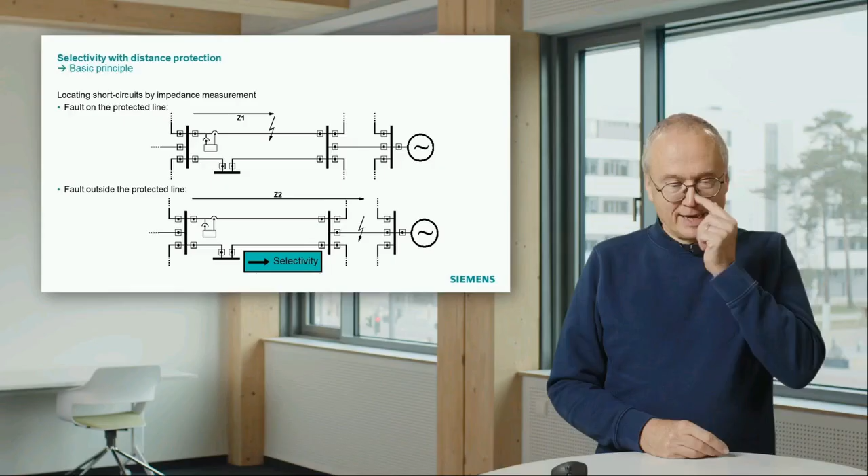This protection relay measures permanently the impedance into the line, and if there is a fault on the line, it measures the impedance of the piece of line from the relay to the fault. That means if it measures this low impedance, it knows there is a fault on the line. If there is a fault on the next line, it will also see this fault, but it will measure an impedance which is a bit higher, and from that comparison of the measured impedance with the impedance of the line, it can decide whether the fault is on the line or not.

That means basically the distance protection principle will lead to selectivity. So from the measurement principle, it is selective, but there is a but, and to understand this but, we have to go a little bit into the details.

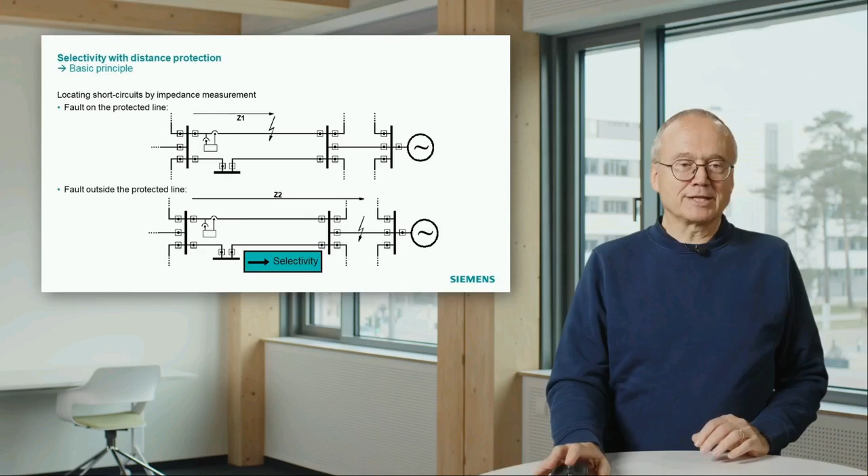First of all, I would like to look a little bit more into this measurement. What does this measurement mean? As a first approach, I make a very simple replica of the line. I just represent the line by a resistance. I know that's not true, but to understand the principle, it's a good way.

That means we assume we have a line. Beyond the line, we have the rest of a system, and we replace that by just an equivalent resistor, in this picture called the load resistor. At the beginning of the line, we measure the voltage and the current and can calculate the impedance. In normal operation, if we measure the voltage and the current and divide the voltage by the current, we measure a pretty high resistance of the line plus the load resistance, which is an equivalent for the rest of the system behind that. It's a pretty high value.

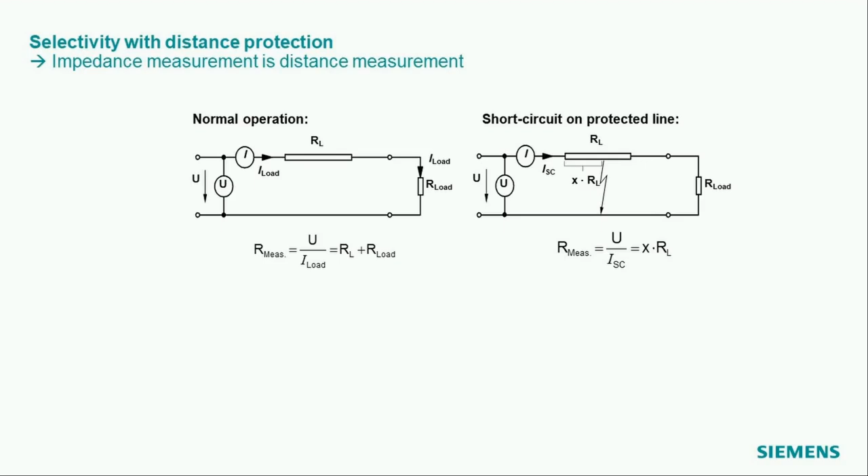If now we have a short circuit on the line, it looks like this: we make a short circuit from somewhere on the line to ground. Then we measure a reduced voltage, a high short circuit current, and the result, voltage divided by current, is a percentage X of the line resistance.

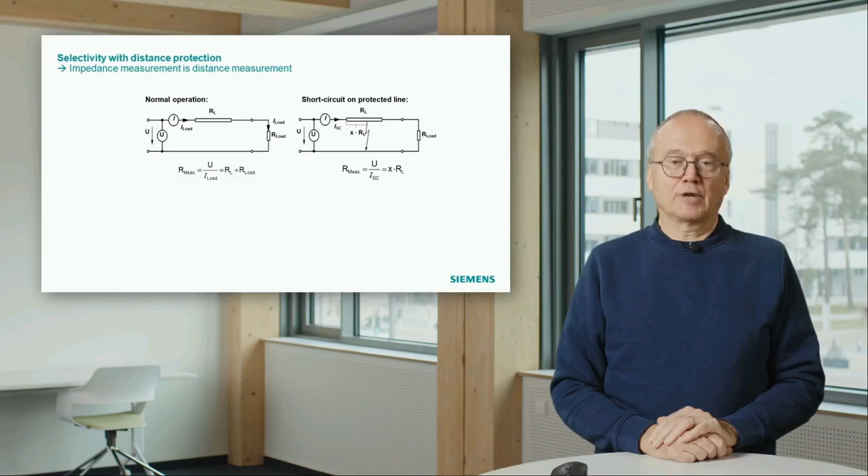If we have a fault on the next line, a short circuit on the next line, it looks like this. We have a circuit where we measure the resistance of our own line, plus part of the resistance of the next line. That means also a low value, but higher than in the first case where we have a fault on our own line. That means if we compare the measured resistance with the known resistance of the line, we can make the decision whether the fault is on the line or not.

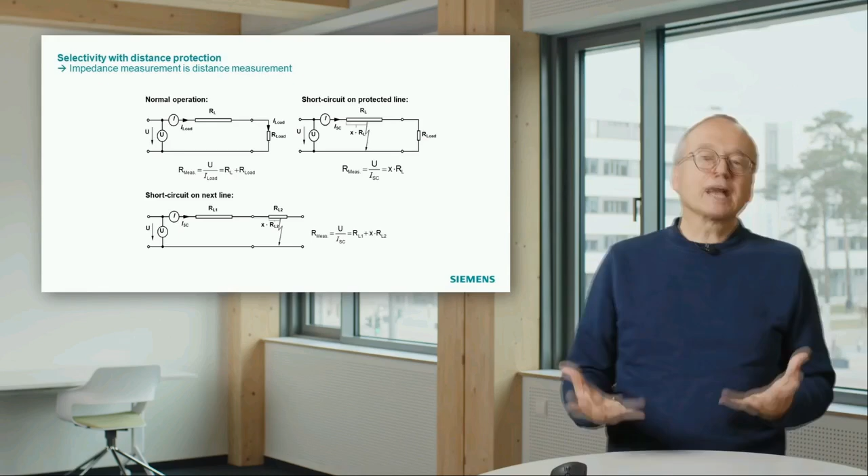In reality, it's unfortunately a bit more complex. We have a three-phase system, and impedances are always defined in loops. If we have three phases, we can define in total 6 loops. We can define the impedance between phase 1 to ground, phase 2 to ground, phase 3 to ground, and we can also measure the impedances between the phases: phase 1 to phase 2, phase 2 to phase 3, and phase 3 to phase 1.

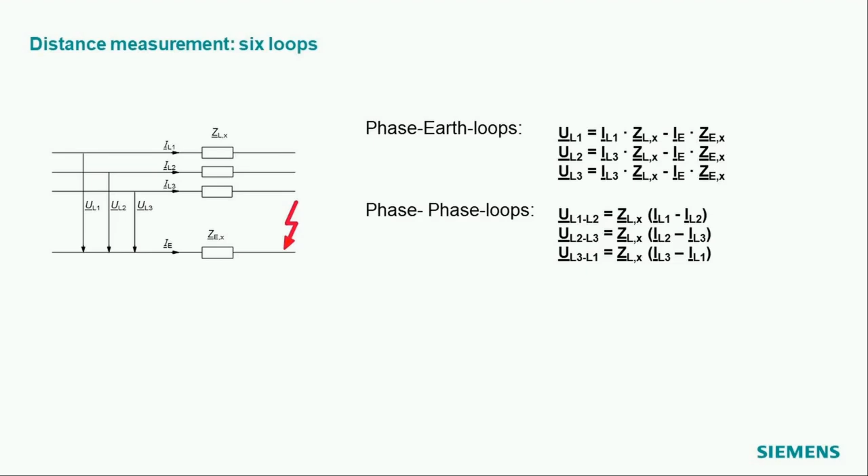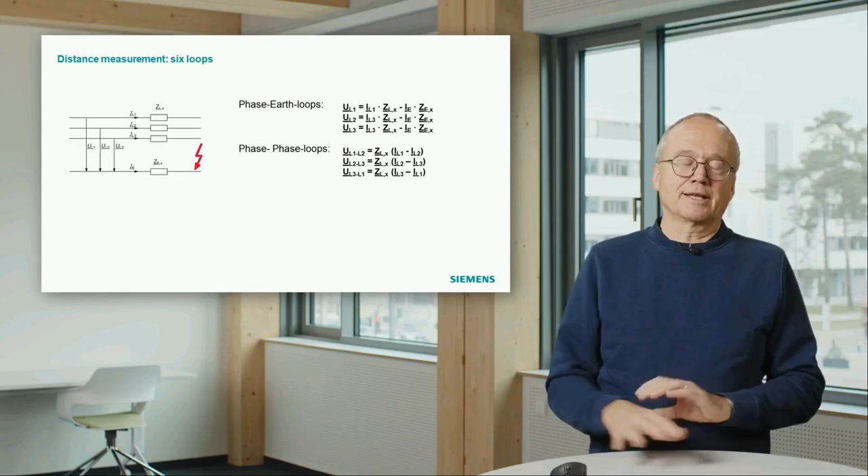That means a normal protection relay has to deal with all these 6 impedances in parallel. That's a bit of workload for the relay, but in most cases we don't have to consider this in the following slides, since normally modern relays always handle these 6 loops in parallel.

You may still have some relays in operation which are called switched relays. In older technologies like electronic relays or electromechanical relays, or also in the early days of digital relays, people were using switched relays, and these relays were only measuring one loop. That means they had to decide in the beginning which loop to measure. But nowadays, all modern relays measure all 6 loops in parallel. That is one thing we have to take into account.

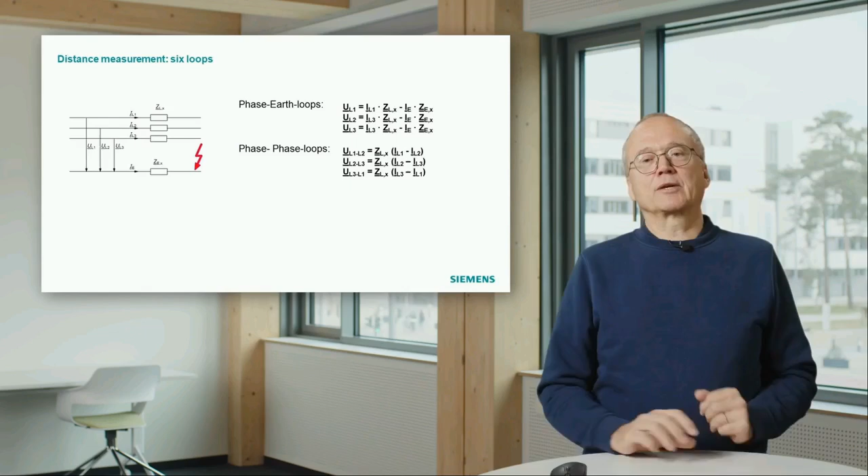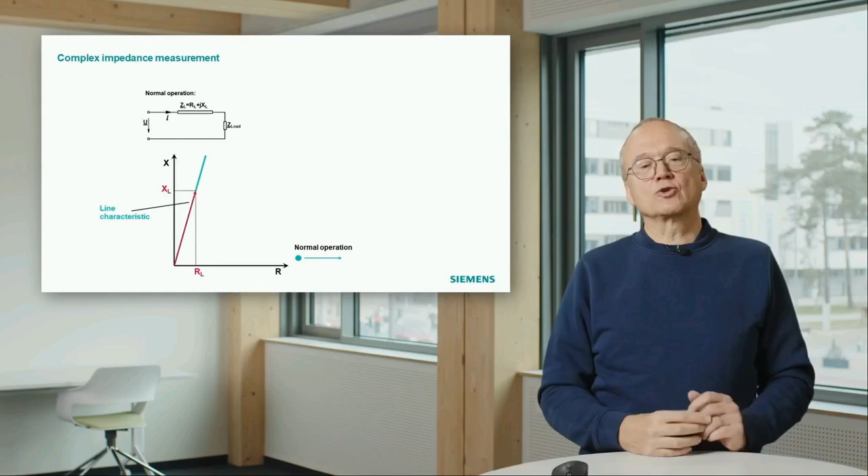If you have a fault on the line, a short circuit, you measure an impedance which is, in this case, in the middle of the line, somewhere here. That means you measure an impedance which is somewhere on our red arrow. If you had a short circuit at the very beginning of the line, you would measure a point at the origin. If you had a short circuit at the end of the line, you would measure an impedance at the end of this arrow.

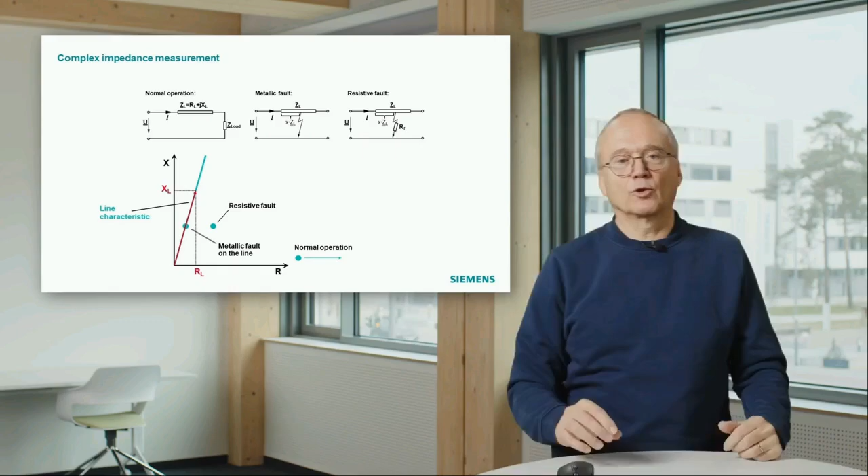If you have a fault with a fault resistance, that is also something which can happen. If you have a phase-to-ground fault somewhere on the tower, with a lightning arc giving a fault resistance and a tower resistance, then you move out to the right. A fault without fault resistance is at a certain location on the red arrow; if you have fault resistance, you move to the right, further the bigger the fault resistance is. And if you have a fault on the next line, you are somewhere out there.

As a result of this discussion, we don't just want to draw nice diagrams. What we want to do is make the decision: is the fault on our line or not?

So what can we take from this? We see the resistive part of the measured impedance is influenced by the fault resistance, and it can be anything - zero, or a high fault resistance. But what we also see is that the reactance is not influenced.

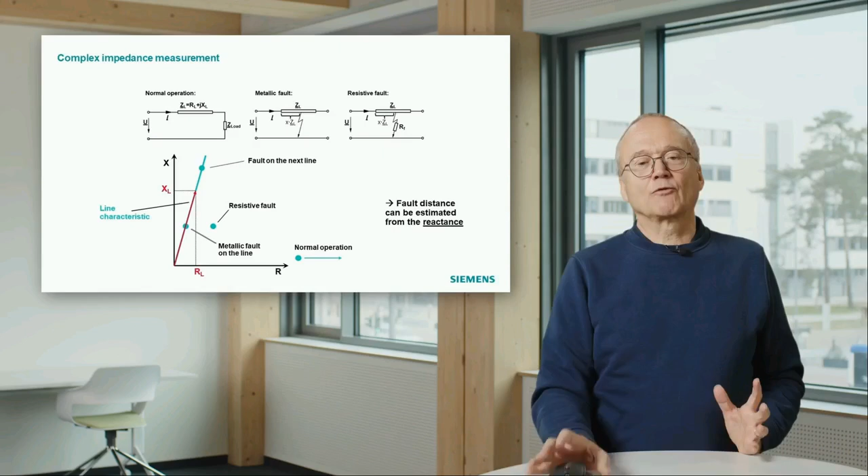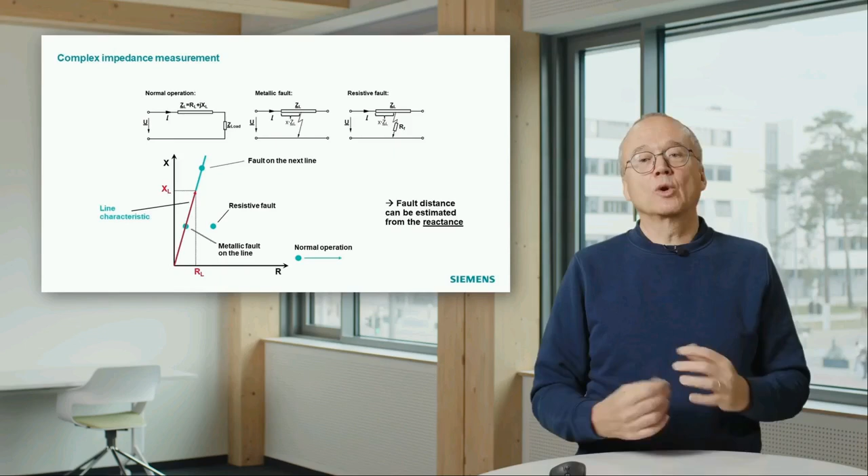That means we can take the measured reactance to the fault as a criterion for whether the fault is on our line or not. The fault distance can be estimated from the measured reactance. We measure the complex impedance, split it into resistive and reactive parts, and take the reactance as a criterion for where the fault is. We compare that with the reactance of the line, and if it is lower than the line reactance, we know the fault is on the line.

That is the idea of the first zone of a distance protection relay. We take the complex plane and define a certain area in it. If we detect a fault in this area, we say the fault is on the line. As we just discussed, the upper limit is the line reactance, so if we want to set a distance relay, we ask our network planning people what the total reactance of our line is, and that becomes our horizontal limit.

Then, to have a complete area, we must also define a limitation on the right side. This is a tricky thing, because we must decide what amount of fault resistance we want to catch. If we make this narrow, and we have a significant fault resistance, we would measure something outside the zone and would not trip.

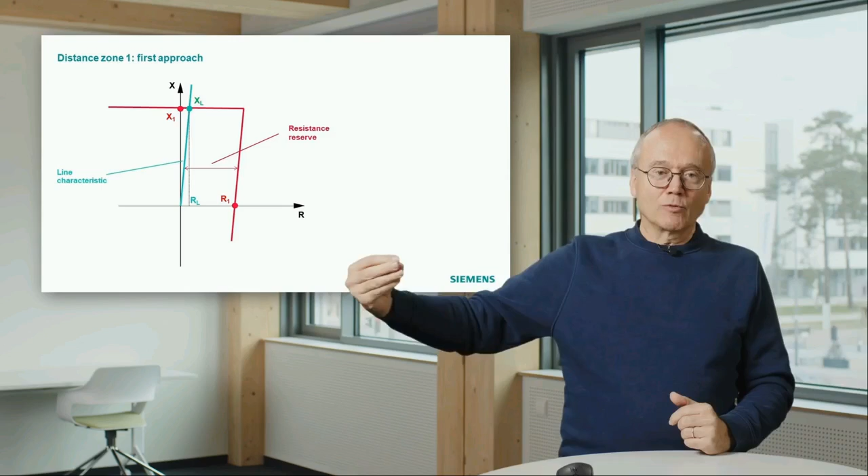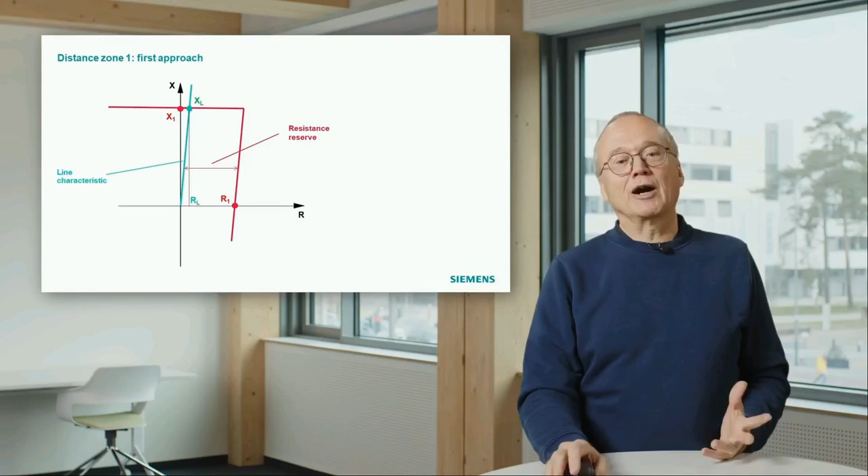If we make it very big, we have the risk that with increasing load flow, we move into the diagram. We must be careful that the right side doesn't go too far - otherwise we'd be very sensitive and able to catch high resistive faults, but in a strong load situation, the measured point would move in and we would trip on load. That's not good. This resistance reserve setting is always a discussion, and we'll talk about it more at the end of this video.

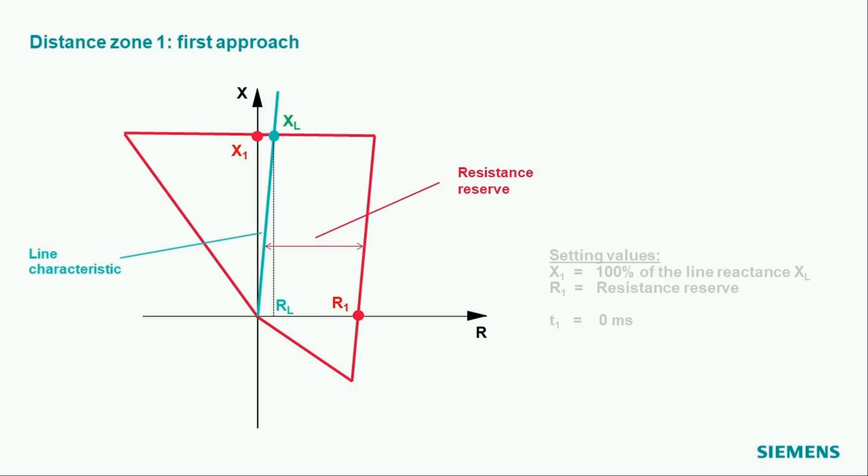To make this area complete, normally we'd limit it to the first quadrant, though for some reasons it's usually widened up a bit. So the first zone looks like this: we make a reactive setting of 100% of the line reactance, and the resistive setting is calculated from the expected fault resistance. If we measure an impedance inside this characteristic, we would trip.

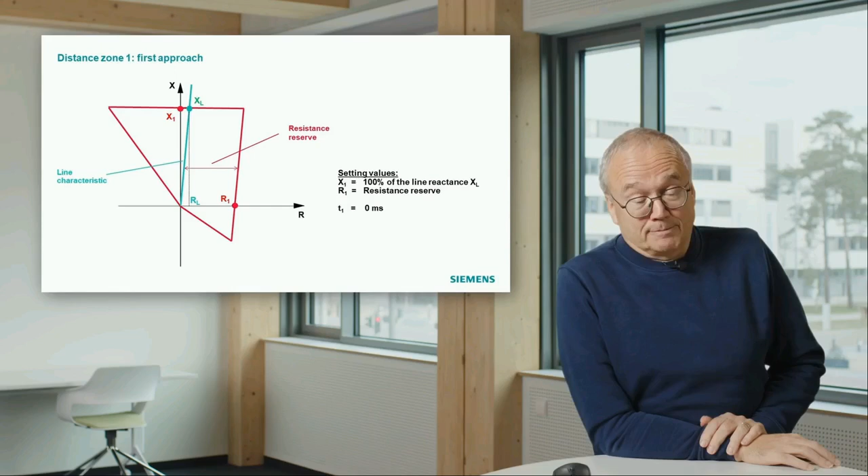So the question is, will that work? It looks nice and selective - as soon as the short circuit is a bit beyond this reactance on the next line, it will not trip. But does it really work? You can imagine, if I ask the question like that, the answer is no, it does not work.

Why will such a setting cause a problem? Because the impedance measurement is subject to measurement errors. In distance protection, you have quite a number of measurement errors. You measure currents and voltages through current transformers and voltage transformers, so you have measurement errors in both. The relays also have limited accuracy, and there are other disturbing effects that influence your measurements.

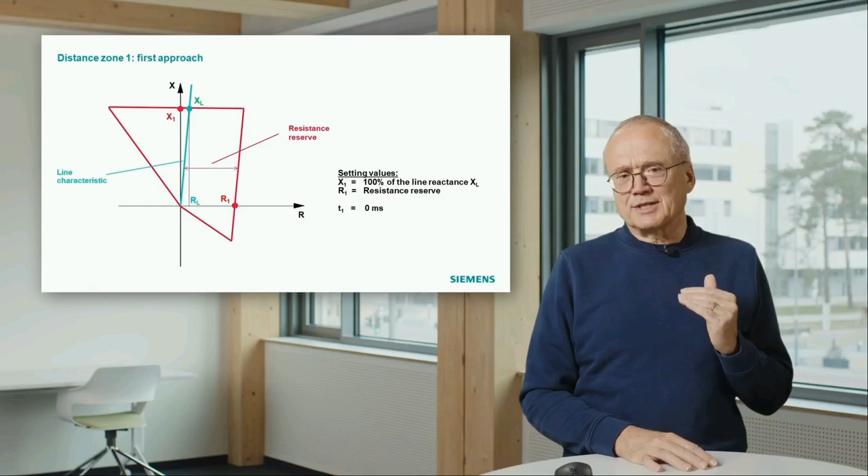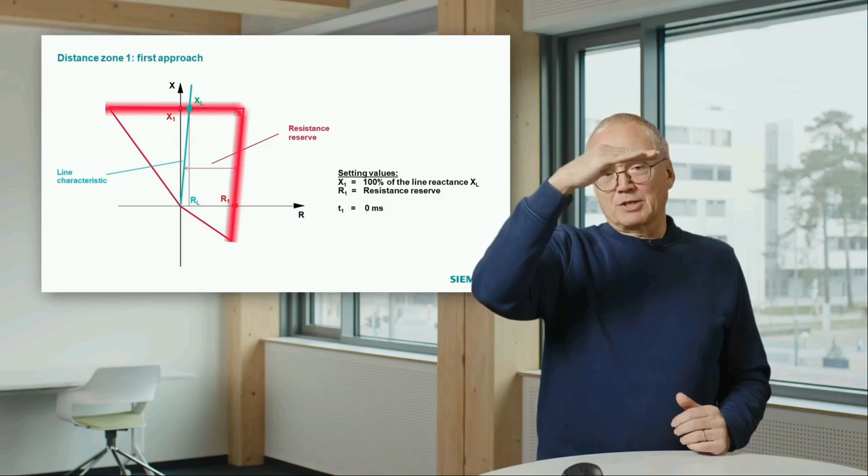If you want to measure phase-to-ground faults, you must know the zero sequence quantity of the line, which is also not very well known. The result is that this horizontal line is not really a sharp line - it looks more like a band, and depending on the direction of the measurement errors, it can be a bit higher or a bit lower. The same applies to the right-side limitation.

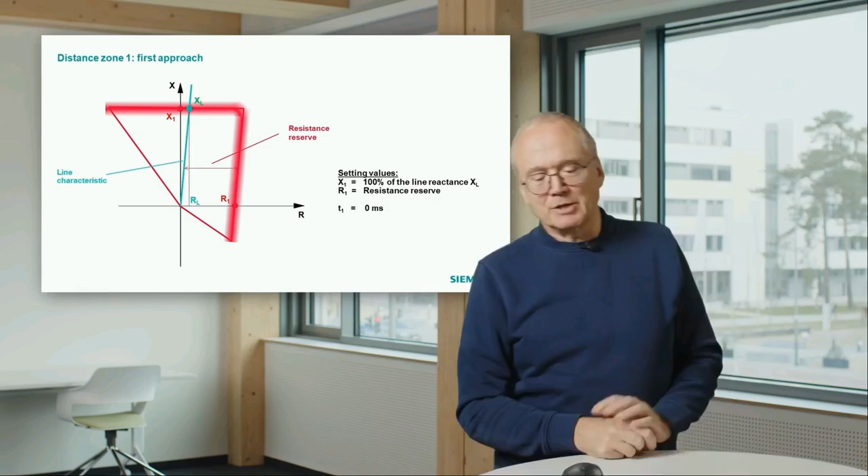What is the result of that? If you have a fault just beyond your line, at the beginning of the next line, it can be seen inside the characteristic due to these measurement errors. Or, if you have a fault just on the line but near the end, the relay measurement might say it's outside - I don't see it in the zone. That is a principal problem in distance protection: you have to live with this unsharp limitation, and one thing that bothers people most in this context is that it may cause wrong trips.

Because a short circuit on the very beginning of the next line may be seen inside the zone with these settings, this approach of making the horizontal limit 100% of the line reactance doesn't work. It may lead to wrong trips, and that is why it is normally not used.

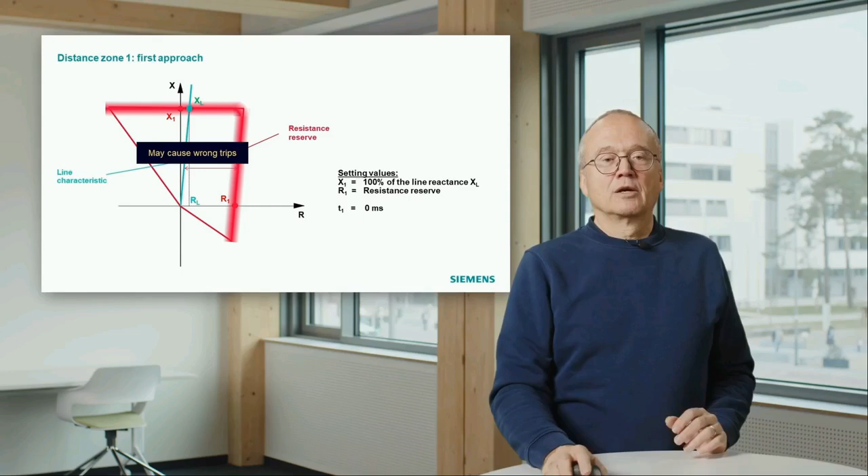So what can you do as an alternative? We start with the same thing. We have here our line characteristic, consisting of the reactive part XL and the resistive part RL. Now we make our limit a bit deeper, a bit lower, to avoid these wrong trips. What you typically do to cover possible measurement errors is make it some 10 to 20% lower.

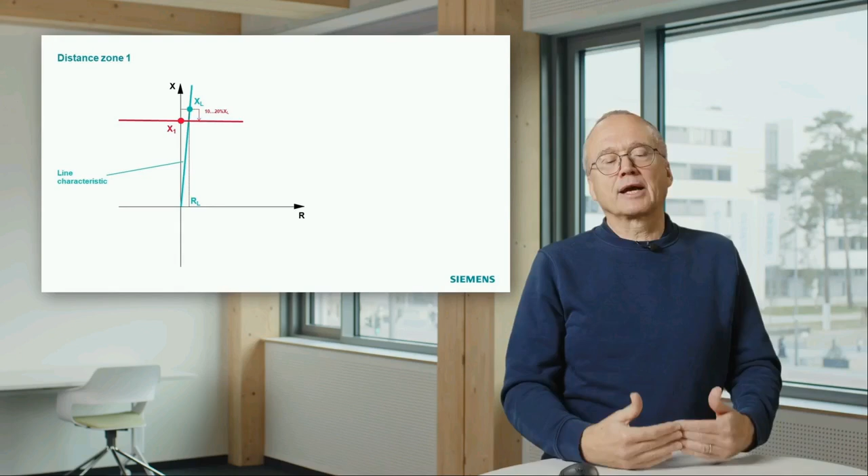That means you set this horizontal limit not to 100% of the line reactance, but for instance to 85%. Then the same for the right limitation for the fault resistance, and to make this area complete, also that limitation. That means we set the X value to 80 to 90% of the line reactance. That is a standard value which is normally applied in distance protection, and it avoids wrong tripping with faults on the next line, even with measurement errors.

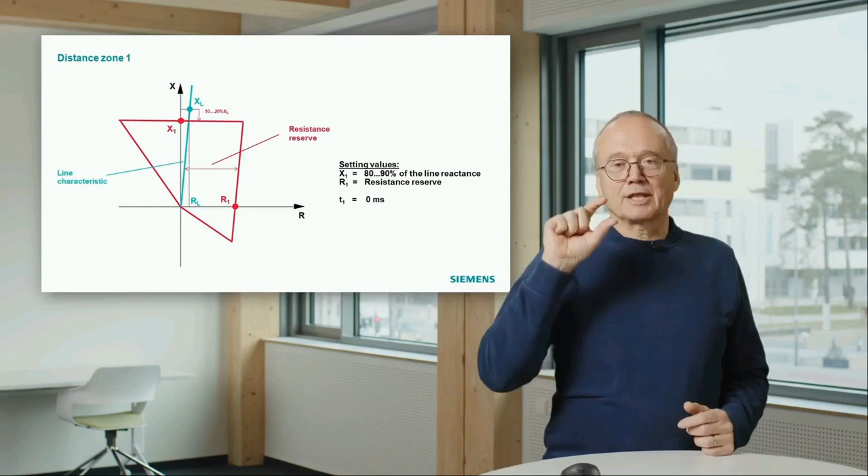But of course it has a disadvantage. You can imagine here, at the end of the line, if we say okay we have no measurement errors, at the end of the line you have a certain part where a short circuit will not be seen in the first zone. But at least you avoid wrong trips, and that is the important thing.

You avoid, with this setting, and this is a standard way of setting distance relays, wrong trips. But we must keep in mind that by using these settings we have a problem: short circuits near the end of the lines will not be seen by the relay and will not be tripped fast. That means we also have to find a solution for that.

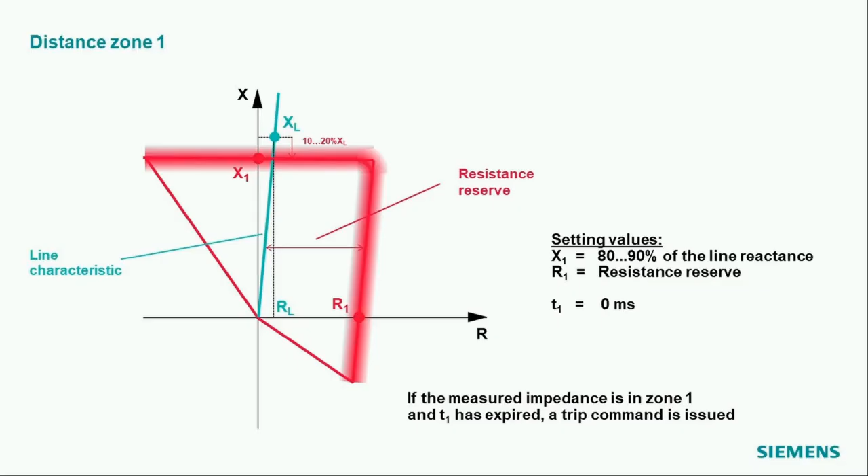Up to now we looked only at one relay. In real life, of course, every line has two ends. That means if there is a fault on the line, the measurement is from both sides. I would like to illustrate that a little bit using a simulation.

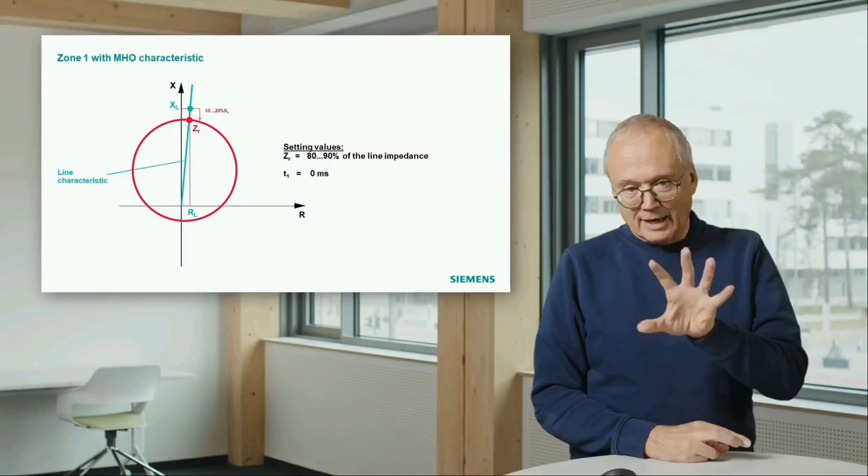The idea behind that is the same. You have this circular characteristic, and the setting principle is also the same. This circle is also a bit of an unsharp thing due to measurement errors, because you have to deal with the same measurement errors. That means you also have to do this reduced setting of 80 or 85%, and then you make a timer setting. All the other ideas I would like to discuss later on are also applicable if we have this type of characteristic.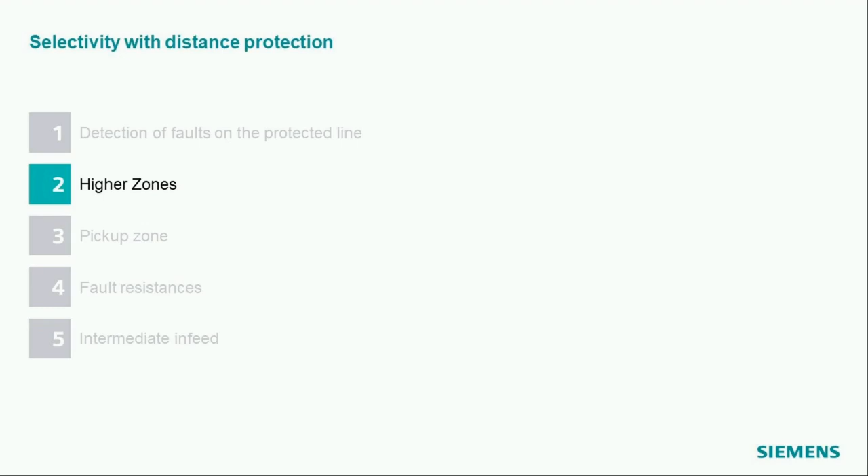Now let's look into higher zones. Up to now we discussed zone 1. Zone 1 reacts on most faults of the line, but we must keep in mind there is a certain part at the beginning and at the end of the line which is not seen in the first zone, depending on the measurement errors. That's one reason why we have higher zones.

If you look into a manual of a distance relay, you will see many zones. So you might ask, why do distance relays have more zones? One possible answer would be to react on faults at the end of the protected line, which I already discussed. Another option is it could be a backup for the next line. The reason could also be that we want to confuse the protection engineer. Or a last thing, these zones are required for other functions like teleprotection, auto reclose and so on. You can imagine I have 4 options here.

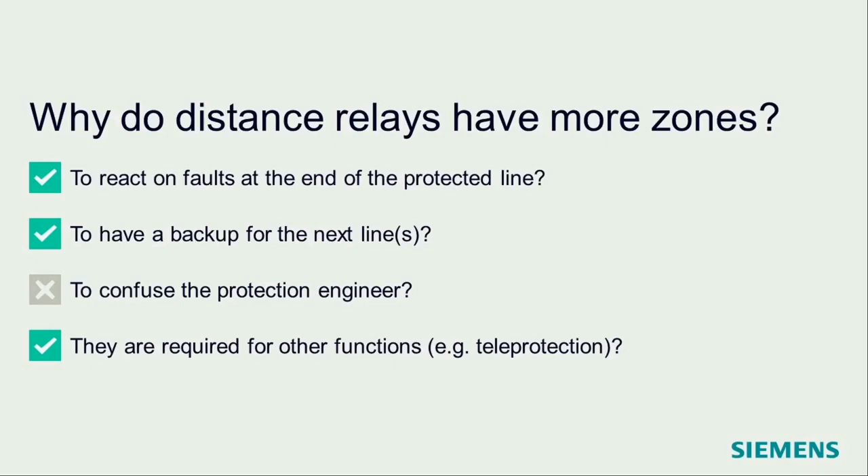3 of them are valid and 1 is not valid, but I would also like to say a few words on that. We will discuss in a bit more detail how to use higher zones to react on faults at the end of the line. We will also discuss the backup situation.

But what about them being used to confuse the protection engineer? Some people sometimes have that impression, and I've had many discussions on the number of parameters, setting values and functions we have in the protection relays. Yes, distance protection is a complicated function. Just based on the principle, you need a lot of parameters to do it properly. And then worldwide you have a lot of flavors and special applications which sometimes need an additional timer here, an additional corner in the characteristic there.

That makes things complicated, and all protection manufacturers have to make up their mind about how to deal with the amount of parameters. Additionally, we must also keep in mind we have a lot of integrated functions in a modern protection relay, and that makes it complicated. Of course, we had to think a lot about that. We had a lot of discussions about how we can make it easier for the user.

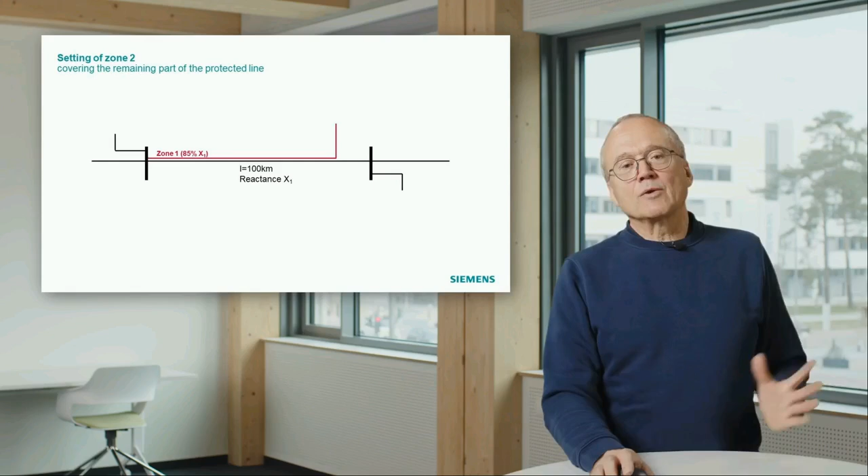Remember, if we forget about measurement errors and assume we have none, the first zone of the left relay would cover 85% of the line. The same applies to the relay on the right side, it would also cover 85%. That means on both sides we have this remaining 15%, exactly 15% if we have no measurement errors. It can be more or less than 15%.

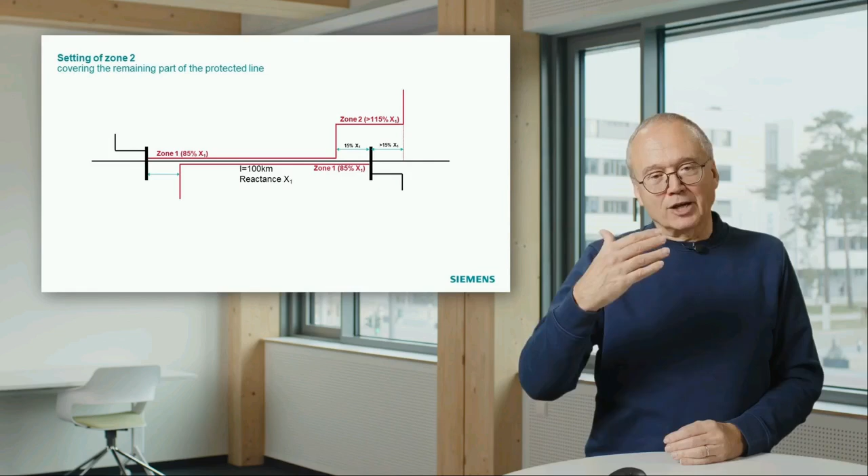So now what we can do is compensate for this problem. We add a zone 2. A zone 2 is just a second zone which looks a bit wider into the line. It should be wide enough so that we are sure the remaining 15% are covered, even if we have measurement errors. That means it must be at least 15% beyond the end of the line.

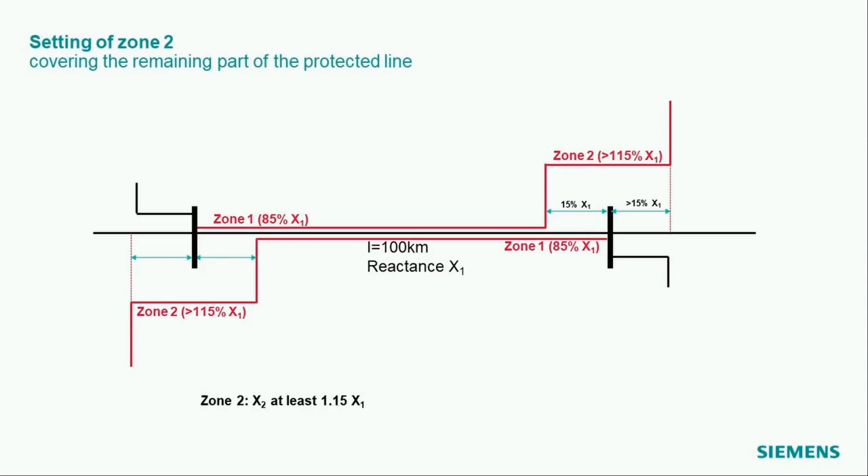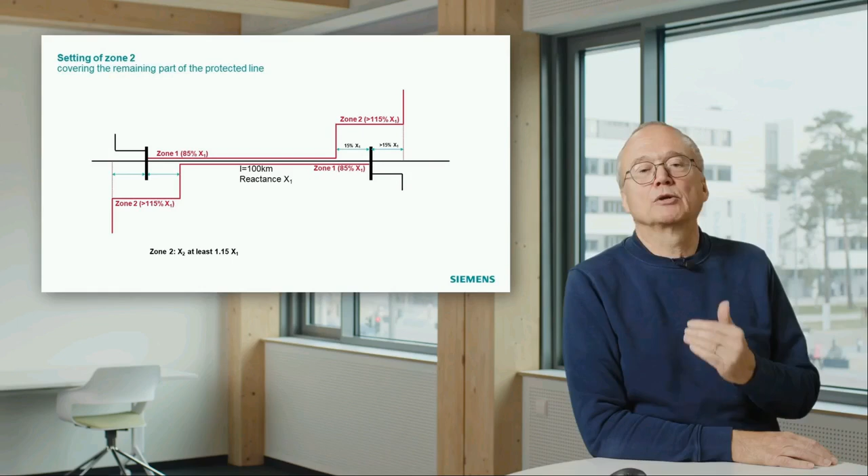If we do that from both sides, if there is a fault in this remaining 15%, this fault will definitely be tripped also from the left side, unfortunately with a little bit of delay, but it will be tripped. That is one purpose of zone 2: delayed trip.

In extra high voltage, delayed trip is not acceptable. That means you have to do some more things to bring this time down. That is where teleprotection comes in, but that's a different topic. So here we are at least sure we see this fault in zone 2 and we will trip on that. That was the purpose, to cover the remaining 15%.

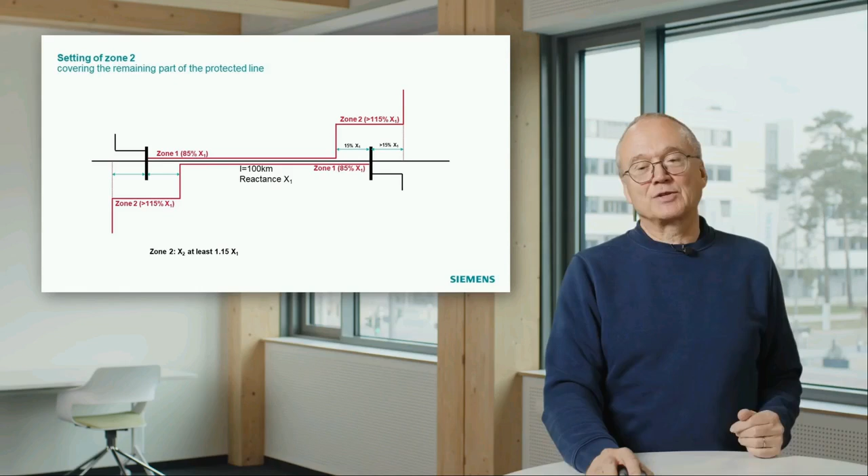But we also have to think about the backup. Remember, we always have to make up our mind: if we have a fault somewhere and the relay which should trip does not trip, what is going to happen then? Distance protection has the nice feature that the remote backup is always there, and I can show that in this example.

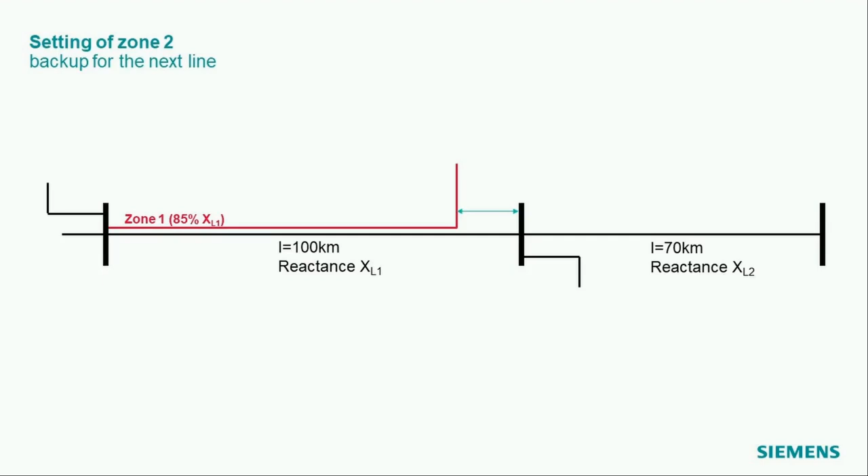We again have our 100 kilometer line, and now I also look into the next line, which is a 70 kilometer line in this case. On the 100 kilometer line that is the first zone, 85%, and the same is also there on the right line, the 70 kilometer line, also a setting of 85%. So now we look at zone 2.

If we remember the setting I just described, it looks a little bit into the following line. That means if we have no measurement errors, it would already be a backup for the first 15% of the 70 kilometer line. And at that point you could have the idea: why don't we extend zone 2?

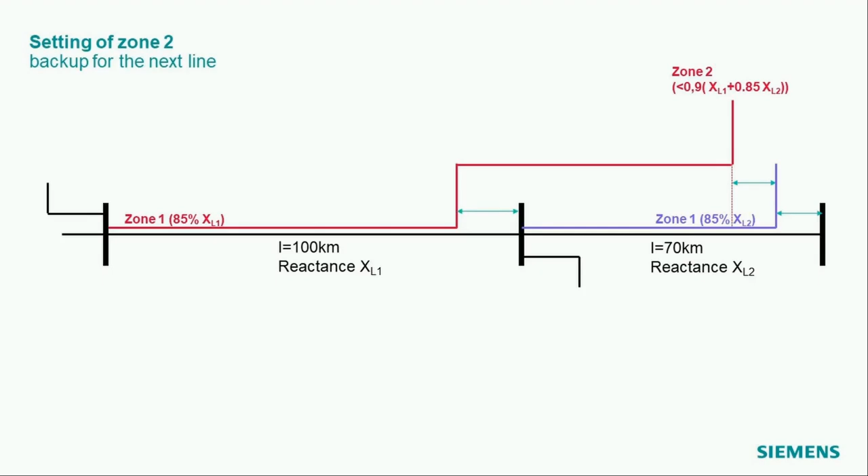Let's make zone 2 longer, then we have backup for a higher part of the line. And that is what you normally do with zone 2: you make it long enough so that it covers as much as possible of the next line as backup.

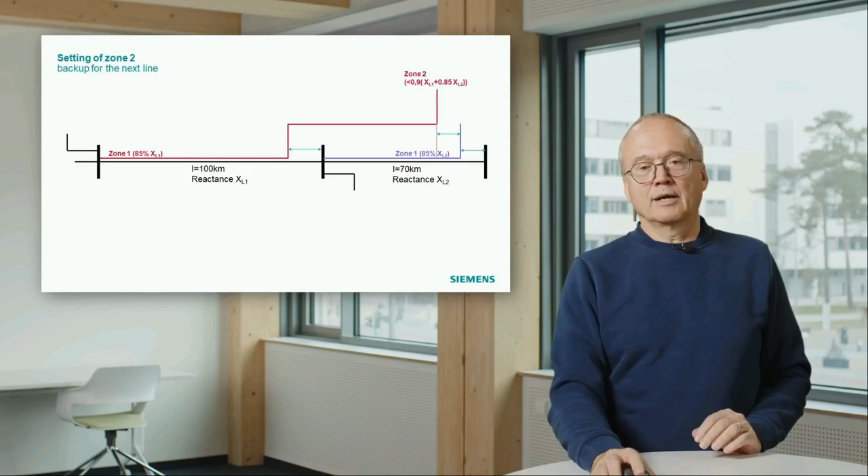Also there you must be careful. You must keep a certain distance to the end of zone 1 of this line, as indicated on the right hand side. Otherwise you will get conflicts with selectivity. But at least with that you can do a backup of a significant percentage of that line.

That means the rule for zone 2 is, as indicated here: at least 15% higher than the reactance of the line, and as shown in that equation, it must keep a certain distance from the end of zone 1 of the next line. The problem, which is not visible in this slide, is that in a meshed system you often have not only one next line, it can be several lines there.

And there you have to take the smallest next line, or the next line with the smallest resistance or reactance. And you can imagine, if you want to do that calculation for a bigger system, doing that by hand is a bit tricky.

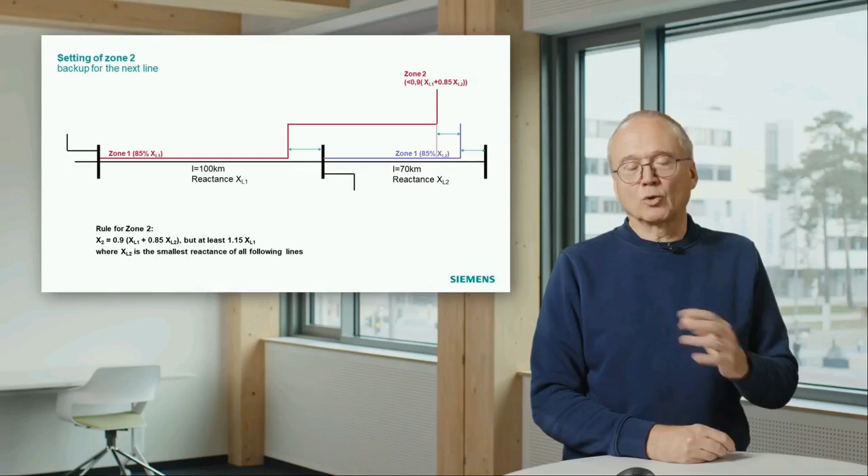You consider one line, this line L1, and here I indicate several next lines. That means all the lines going away from the next substations. They have different length, and the grading must take into account the length of the shortest following line.

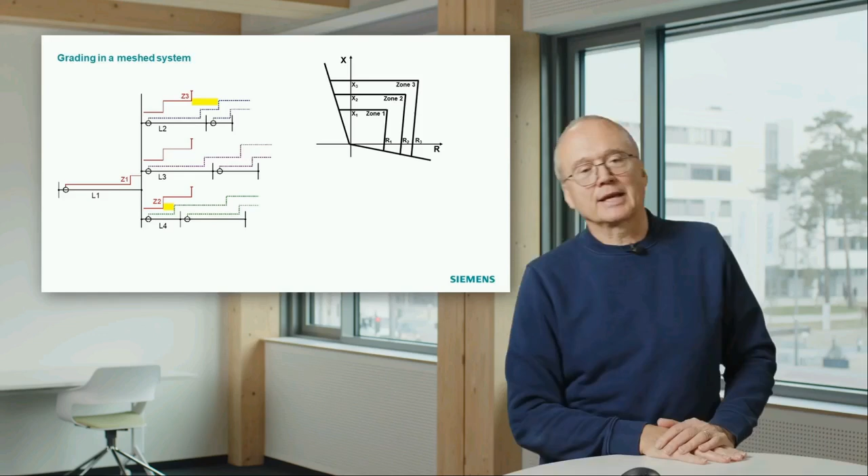That is in this case the L4, and you see this yellow arrow there, which indicates that with the reach of zone 2 of our line 1, we must keep a certain distance to the zone 1 end of line L4.

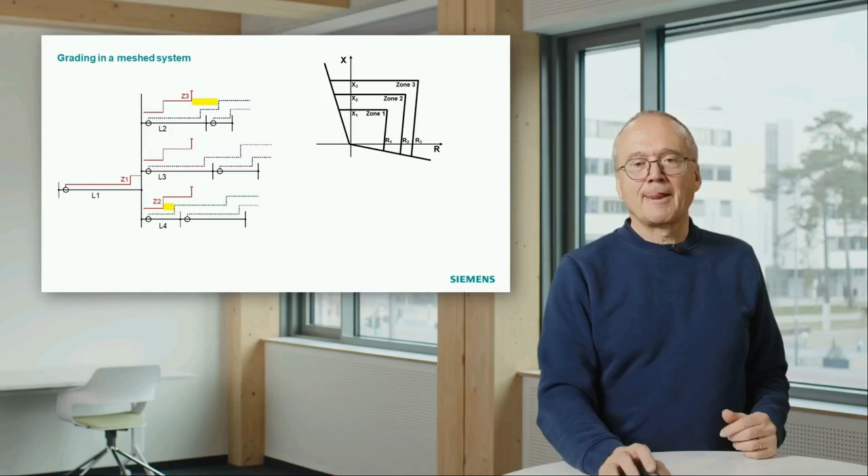And this can be continued not only to zone 2, you can also define a zone 3 and whatever you need in your application. There are different numbers of zones in use. So you end up in such a diagram.

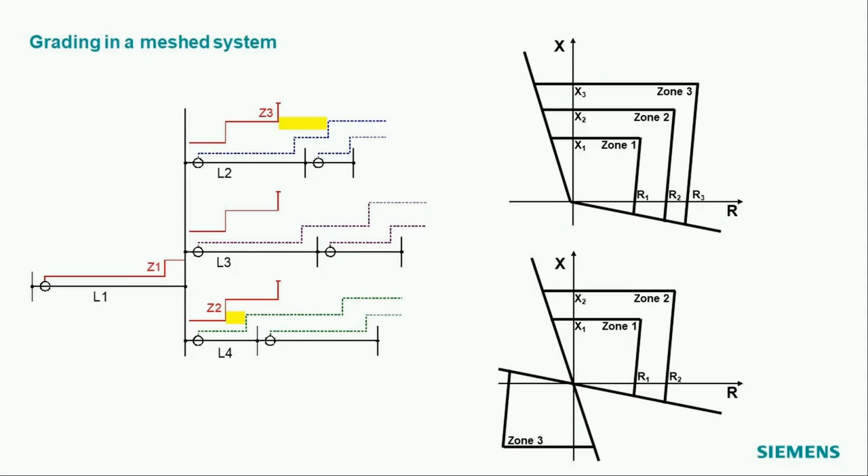Sometimes you also have applications where, for any special reason, you want to look a little bit reverse. That means instead of looking only forward into your line, you make one zone which looks reverse. That is typically also a backup application. That means in addition to the zone size, you also have a parameter defining whether a zone looks into a forward direction or a reverse direction.

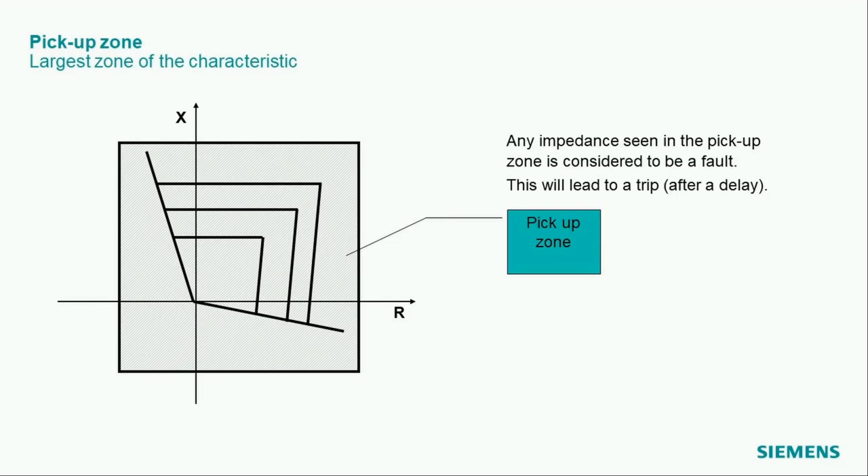And then, if you look into a manual of a protection relay, you often find in the description a so-called pickup zone. What is that? Actually, the pickup zone is the outer zone. That means, depending on how many zones you have, it's the biggest zone. In some relays it has a different name. It's really called pickup zone, but sometimes it's just the outer zone.

And this pickup zone requires particular attention, because you must be careful to define the size of this pickup zone. And this pickup zone defines two things.

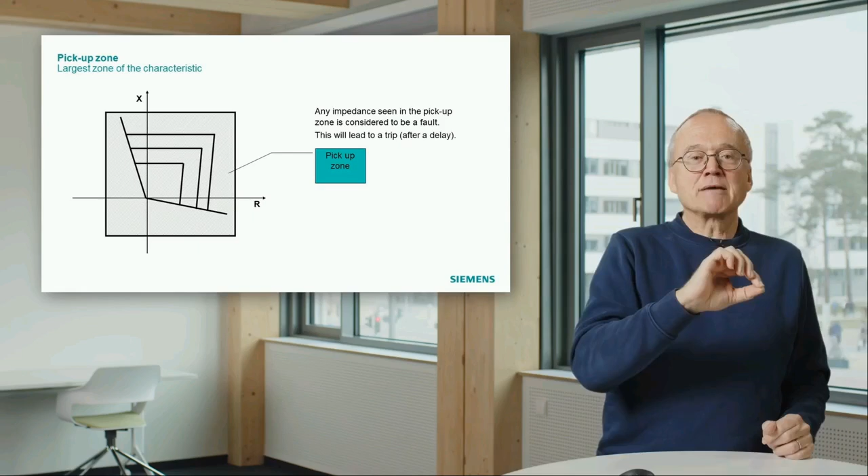You should be aware if the impedance measurement with heavy load—remember, with heavy load you are approaching—the measured impedance is approaching your characteristic. And if you are in a critical situation, you suddenly may move into the characteristic and then you will trip.

You normally have delay times, so all zones have delay times. That means the pickup zone typically has the highest delay time. So it may have a delay time of a second. But if it moves in a second, the control center is not able to react on that. You will trip. That means if you define your pickup zone, you must be pretty sure that you don't run into the

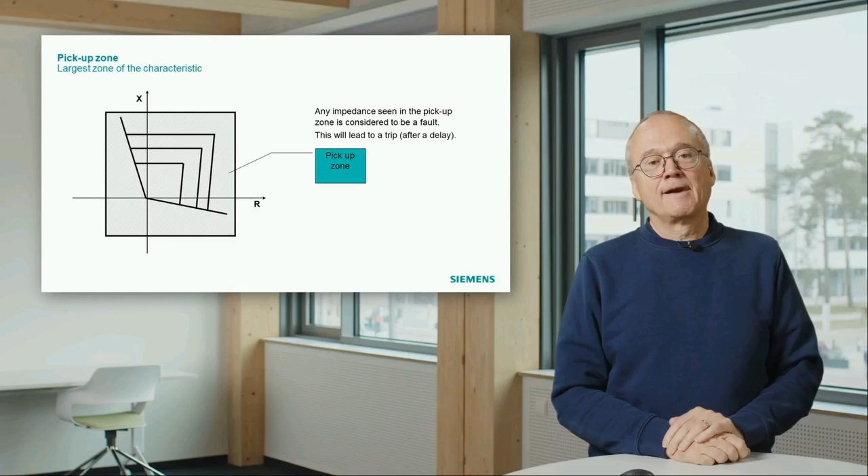pickup zone in normal operation. That means make it small. The other thing is you can only detect faults inside the pickup zone. That means if a fault has a fault resistance, remember it moves to the right, so it moves in that direction. That means if you make your pickup zone too small, you have the risk that you don't see some faults. You may have resistive faults that you don't see. And that makes the setting of the pickup zone a bit critical.

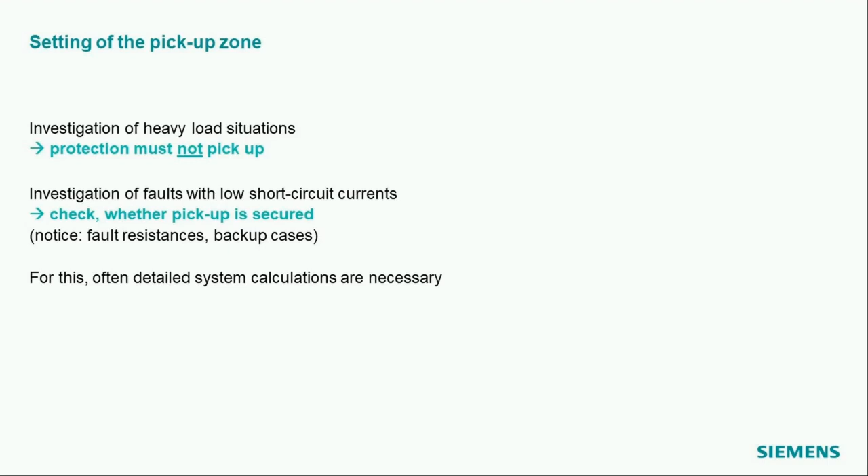You must investigate heavy load situations, and you must make the zone setting small enough that the protection does not pick up. In heavy load situations, the critical thing, for instance, is you have a system, maybe with a heavy load transfer from one area of the system to the other. That means the lines connecting these two parts of the system are heavily loaded.

And now you have a thunderstorm and one line has a short circuit, it trips. In case of a short circuit, we have to trip the line. What's now going to happen? The other lines connecting these two parts of the systems have to take over, because one line is shortly out of service because of the trip. The other lines have to take over.

That means they are overloaded for a short time. And if at that moment you run by this overload into the characteristic and you will trip, that means you lose even one more line, and then you end up in a cascading outage, and that may end up in a blackout situation.

So that is a very thing where you really have to do investigations. You have to find out all critical situations which may occur, not only today, but also in future, because you want to define the settings now, and they should also be valid in a couple of years. The other thing you also have to investigate is faults with low short circuit currents. That means you have to take into account fault resistances, and you also have to take into account backup cases. And also there, detailed calculations are necessary.

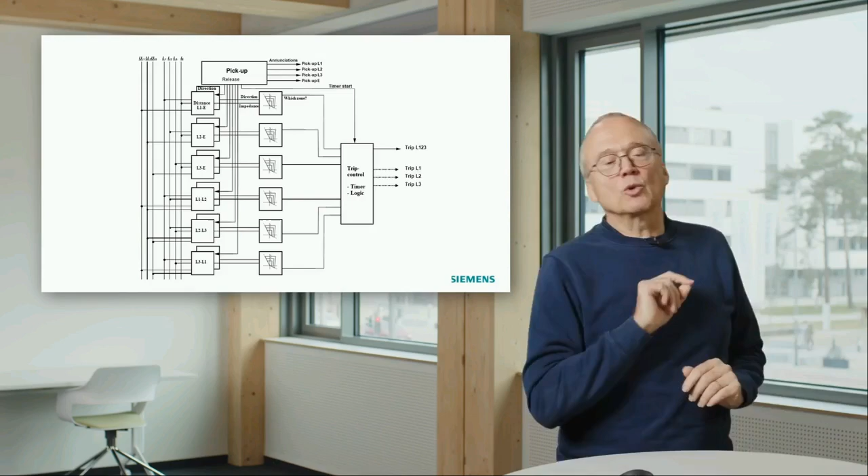And what you also see here is we have 2 different options for a trip. The standard thing is to trip all 3 poles of a breaker. But remember, in overhead lines we often have auto reclose active, and in auto reclose we have, in many applications, the concept of single pole auto reclose. That means we don't give a trip command for all 3 poles of the breaker - we see what type of fault we have, say a phase 2 to ground fault, and then give a trip command only to phase 2 of the breaker.

That means protection relays which are able to do single pole auto reclose have, in addition to the 3-pole trip, also single pole trip commands.

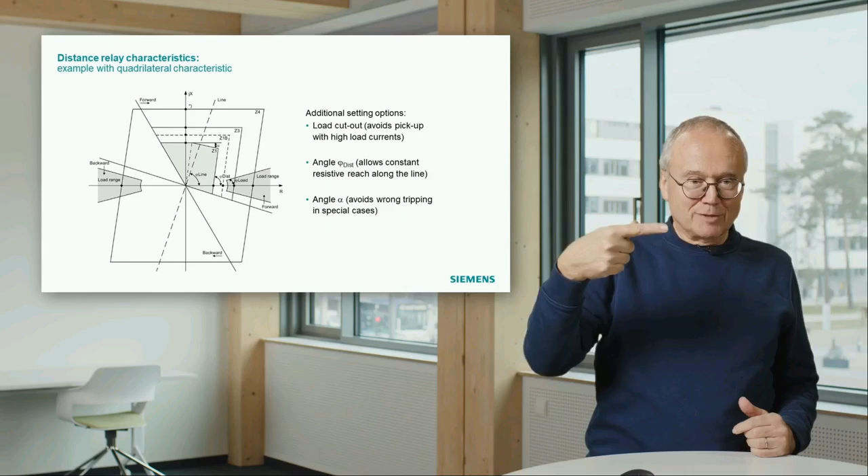What is also visible here are these load cutouts on both sides, shaded in gray. These load cutouts have been designed to allow, on one hand, that the measured impedance can move somehow into the characteristic, can approach it. In the area where the load typically is, around the resistive axis, we cut out a bit of the characteristic. That means if the measured point approaches the characteristic, moves in, but stays within this gray area, then we will not pick up. That's called load cutout.

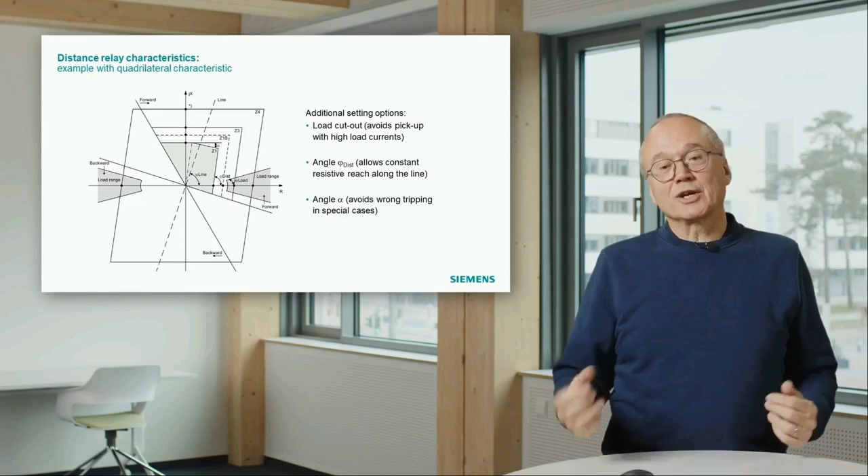But on the other hand, if we have a short circuit somewhere in the upper right corner of the relay, we can still react on that. This conflict between shrinking the pickup zone to avoid load problems and making it big to catch all the faults can be solved a little bit by making this load cutout. Of course, there are a couple more parameters used to define this load cutout, which are not used in all applications.

And the same is also possible for the Mho circle - also there we offer the possibility to make such a load cutout.

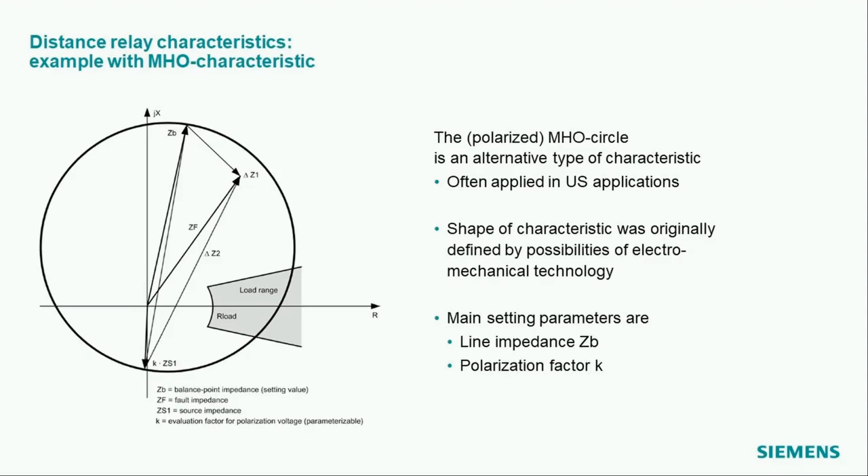In the final part I would like to talk a bit about fault resistances, because dealing with fault resistance is unfortunately a topic you are often facing if you deal with distance protection. Because if you do the zone settings, you have to think about fault resistances, and for that reason it makes sense to look at that a little bit more in detail.

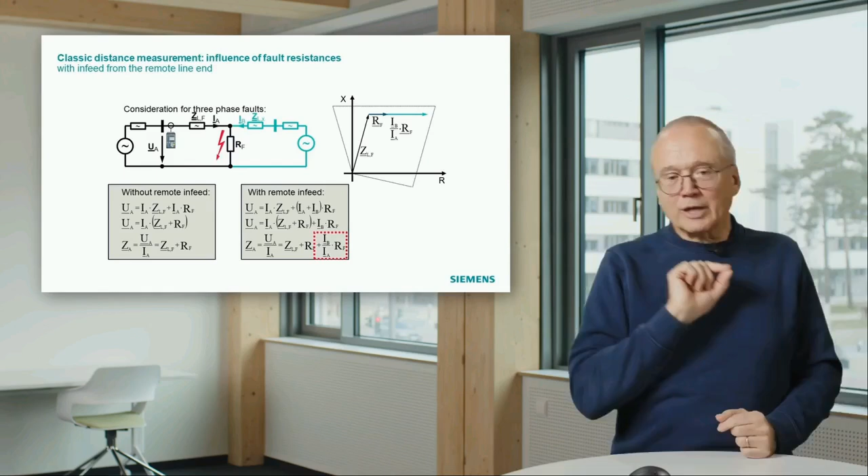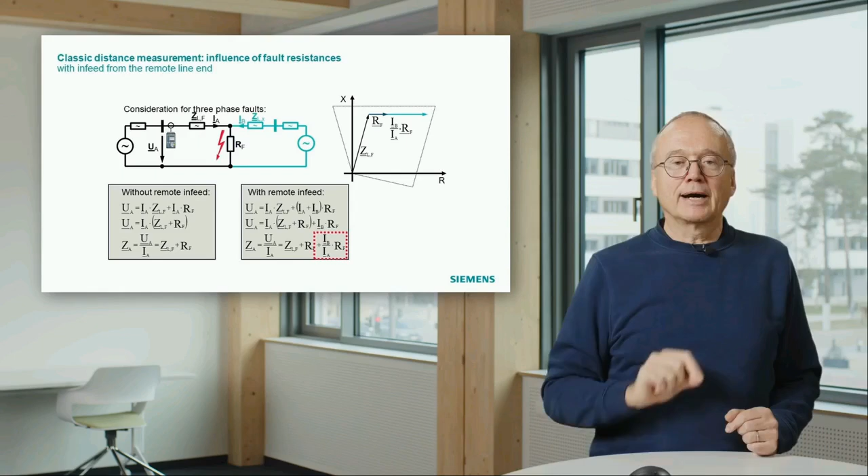And what you can also see from this simple calculation is what is the worst case. The worst case is if this ratio IB over IA becomes pretty high. And that is a situation where the majority of the short circuit current comes from the other side. That means if our left protection relay has a weak infeed behind it and you have a strong infeed on the other side, then this ratio becomes pretty high, and then you may move out of the characteristic.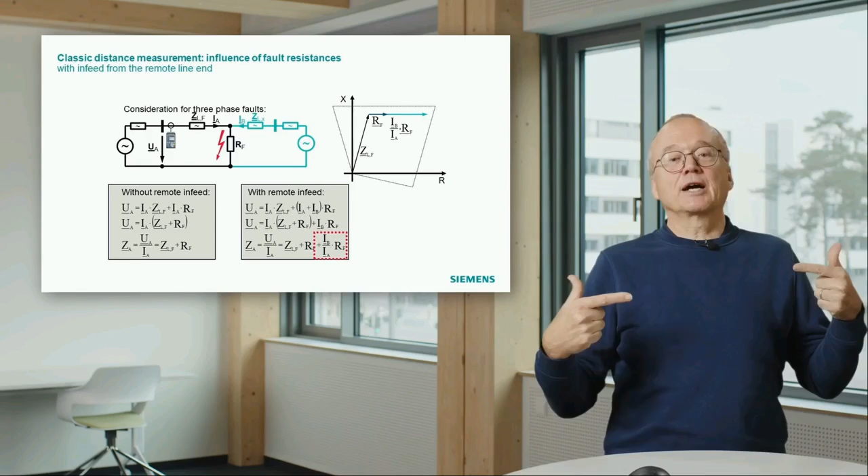And that's only one part of the story. It goes even further. These quantities here are complex quantities. That means the ratio can become complex if the phase angles of the currents from both sides are different. And if this ratio becomes complex, you do not only have to add a horizontal error, it can turn the whole thing a little bit.

And that means you can even, if you are close to the limit, go to the right and you can even go up here and leave the characteristic over there. So for that reason, that has to be taken into account. And also this we can discuss a little bit more using my simulation.

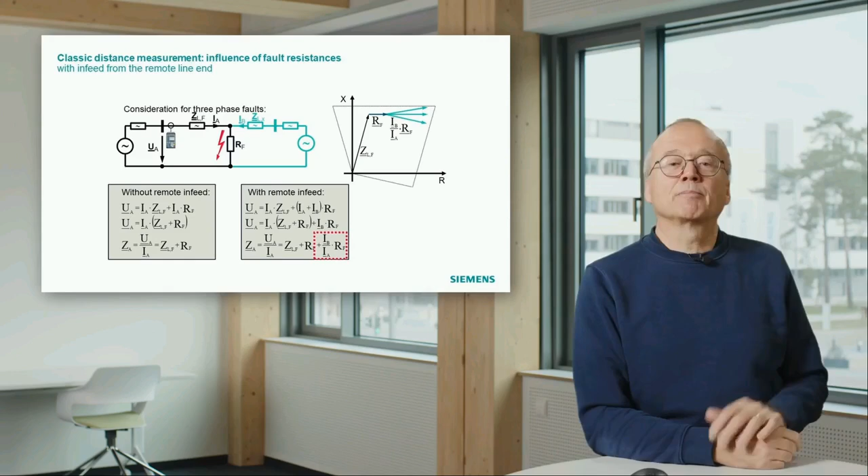I'd now like to show these discussed cases again in my simulation, just to repeat and you see what's going to happen. So we see here again the line with a fault on the middle of the line. In this case, I have set the infeed from the right side to nearly zero. That means we have no current, no short circuit current coming from the right side.

And that is why the red dot on the right relay side is missing. Because if the relay doesn't see current, it cannot do the measurement. Every distance relay needs a certain minimum short circuit current to do the measurement. Again, that is a setting value which has normally a reasonable preset, so you don't have to change it.

So now let's see what happens if we add fault resistance. We move to the right. Here this is 10 ohms. And what you now see is if we are at 20 ohms, you are nearly at the limit. We made a setting of 20 ohms. We have infeed from one side and we exactly see what we expect.

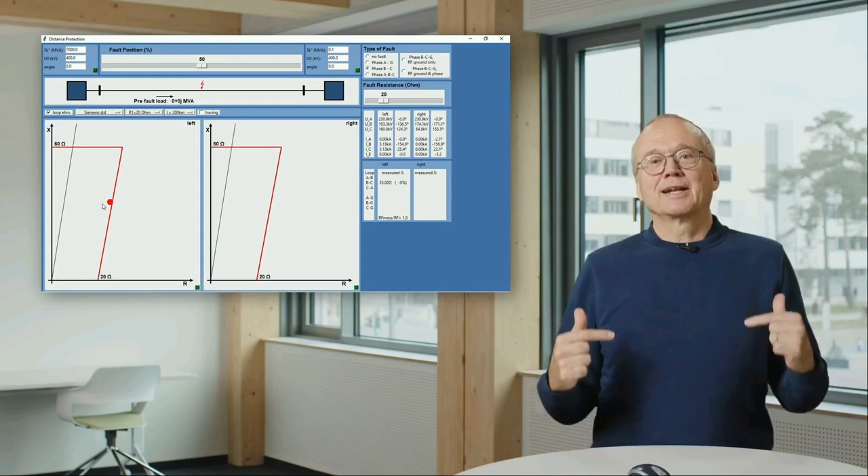Now the next step is, let's reactivate the infeed from the other side. So I will take the resistance back. I will now add or reactivate the infeed from the other side. Now we have the situation: the fault is again on the middle of the line, but we have current coming from both sides. And as the infeeds on both sides are more or less identical, we are on the middle of the line.

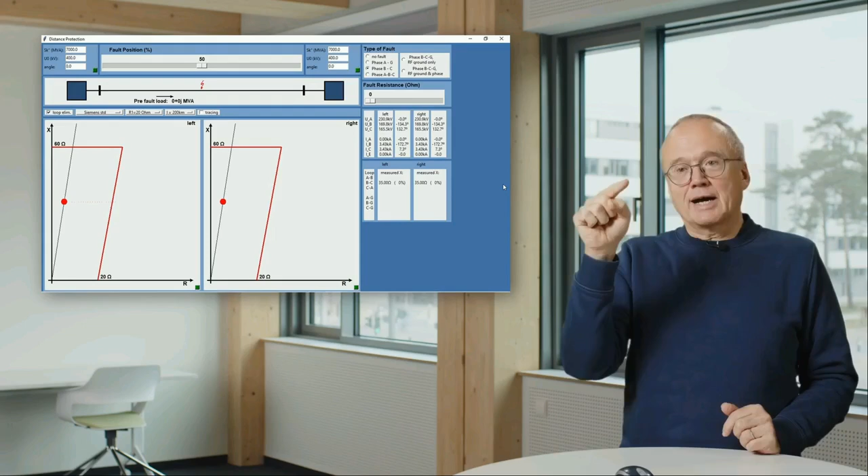We have the same short circuit current from both sides. That means this ratio IB over IA I showed on my slides is 1. And that means what we measure, the impedance we measure, is the impedance of the piece of line, 50% of the line, plus fault resistance, plus IB over IA multiplied by fault resistance, which is 1. That means we measure 2 times the fault resistance. And we can see that here as a result.

We move now much faster to the end. That means already with 10 ohms, we are now reaching the limit. We have a setting of 20 ohms and we are approaching the limit already with 10 ohms due to the short circuit current coming from the other side.

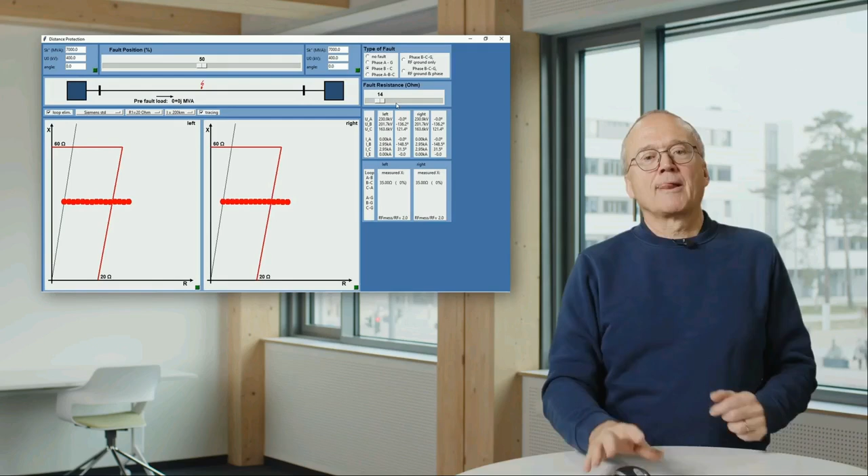But, and that is the good thing, we still move horizontally. You can show that a little bit better by activating this tracing. So you see here, with increasing fault resistance, the reactance measurement is not influenced. That means we just have to look at the reactance limit.

We must be aware in this setting and at this location we can only detect faults up to a fault resistance of 10 ohms in the first zone. A fault with a higher fault resistance would probably be seen in a higher zone.

Okay, now we can make the fault closer to the limit. Maybe we have a fault here. And if we now do the same thing, we see we move still horizontally, but what we see now is...

Let us say we take 10 ohms. Here the left relay is already outside the characteristic, whereas the right relay is still inside the characteristic. Why is this? This is because, remember, what we measure is impedance of the part of line plus fault resistance plus IB divided by IA multiplied with the fault resistance.

If we have a fault at that point, for the left relay, the current it sees is lower than from the other side. The fault is very close to the right side. That means the majority of the fault current comes from the right side. Only a smaller part comes from the left side. That means the ratio IB over IA becomes much bigger than 1. And that is why the measurement of the left relay moves faster to the right than the measurement of the relay on the right side.

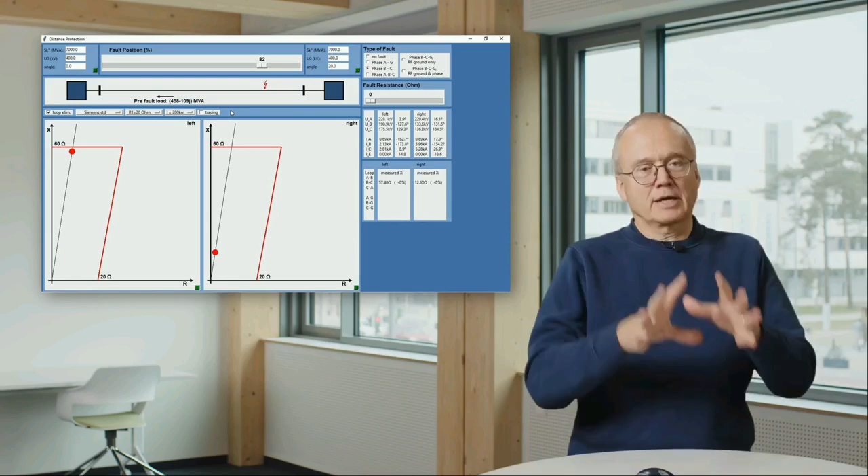And one thing we implemented and we really recommend is the so-called RMD method or reactance method in our protection relays. That means in our protection relays you have the possibility to activate either the conventional algorithms, as I showed up to now, or you can activate the RMD method, which then solves to a certain extent this problem.

Unfortunately, you have to set again a few parameters. Sorry for that, but the algorithm requires that. And I can also show in the simulation what happens. I called it here reactance method. In the manuals you find RMD method. I have now activated this method.

And what you see is if I do that, then although we have pre-fault load flow, the movement is horizontal. That means it really gives a better measurement in case of fault resistances and pre-fault load flow. And for that reason, and because it also has some other advantages, we highly recommend to activate that method in our protection relays. So that was a short look at the simulation.

We will now continue with the slides again. So after this look into the simulation, I would like to do some concluding remarks on the issue of fault resistances. We saw that fault resistances in conjunction with pre-fault load can influence also the reactance measurement. That means they would move the measured impedance not only to the right, but also up or down.

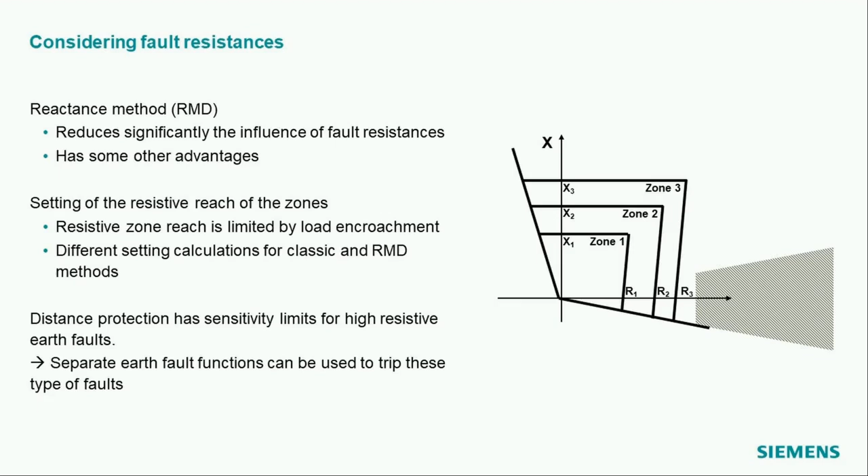This can be avoided by activating the reactance method in a distance relay. So it reduces this influence. Theoretically, it cannot reduce it to zero, but for practical applications, it's okay. And besides that, it also has some other advantages.

If we talk about how wide can we set the resistive reach of the zones, you think, yeah, let's set it very wide so we make the relay sensitive. We always have to think about load encroachment. That means we cannot make it as wide as we would like, because we always have to avoid that a load point, that during heavy load situation, a critical network situation where something happened but no short circuit, that we suddenly move into the characteristic and trip.

And this load cutout can help us in this context. And important is that you do proper setting calculations for the resistive reach. And they are sometimes different, especially if you look into single phase to ground fault. They are different for the classical method and the RMD method. So please have a look into our setting examples in the manuals.

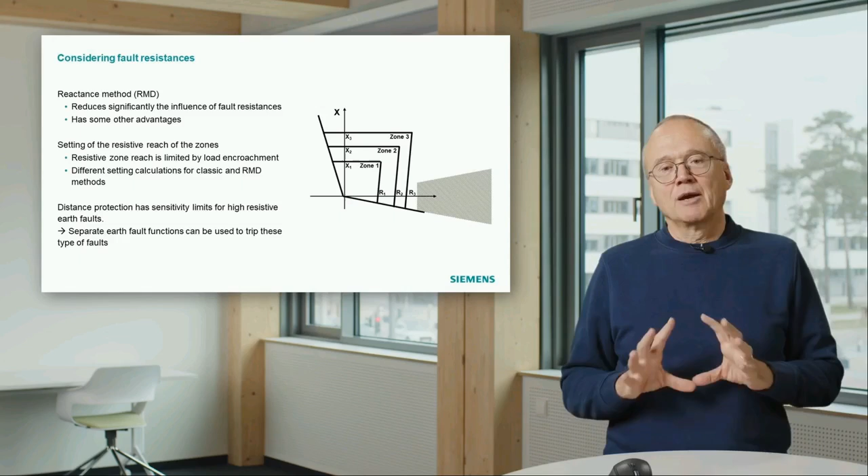But whatever we do there, we have some sensitivity limits. That means we can catch faults up to a certain fault resistance, and everything beyond that is not visible for the distance relay. And if we want to catch high resistive faults, we may have to activate separate earth fault functions which are tuned to detect these faults. Typically they are not so fast because there are no high currents involved in these cases, but you can then tune other principles a bit to detect these type of faults.

And the last thing I would like to mention in the context of sensitivity with distance protection is also an important thing, is the role of intermediate infeed. And intermediate infeed is a thing which is only relevant for the backup case.

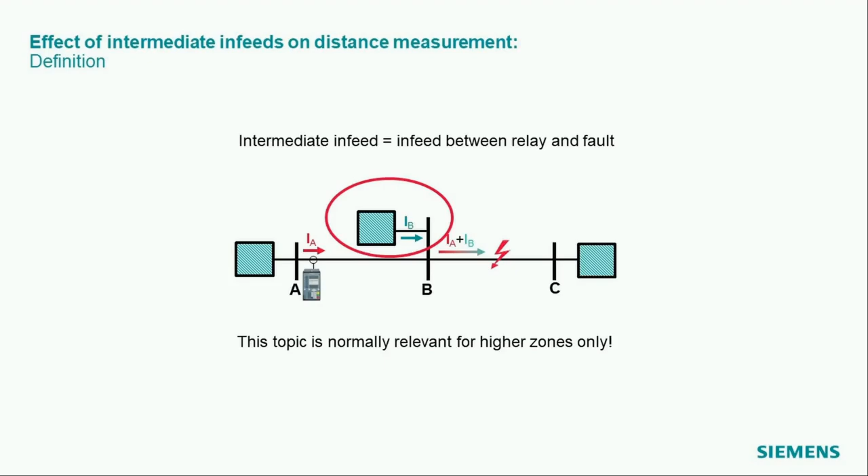This infeed is called intermediate infeed, and it also disturbs our measurement, because it injects this blue current, which flows through this part of the faulty line to the short circuit. It generates a voltage drop across this line, and this voltage is seen by our relay and influences the measurement.

You can again set up equations as we did for faults with fault resistance. On the left hand side you see the equivalent diagram for the situation without intermediate infeed. Our relay measures the impedance of its own line plus the impedance of the part of the next line up to the fault. We assume a fault without fault resistance to keep it simple, and then we can calculate from that the impedance of our own line plus the impedance of the next line.

If we do the same thing for this situation with intermediate infeed, the equations change a little bit. If you write down the equations, you again get this red dotted box with a ratio IB over IA. That means you see an additional impedance. The measurement gets a measurement error, it gets a higher value, and the value is IB over IA multiplied by this impedance of the line.

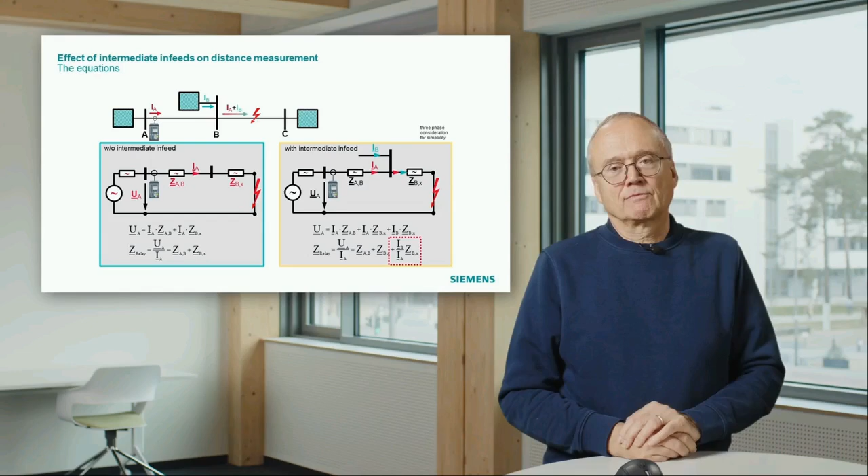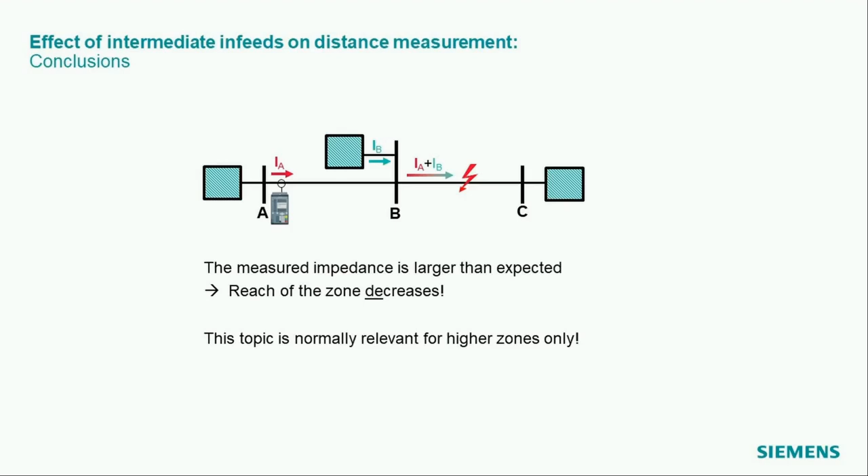Now what does that mean? Imagine you have a setting of zone 2 that looks into your next line as a backup case. Maybe you calculated the setting and found out you cover maybe 70% of the next line in a backup. That's only relevant for backup, because we are dealing with the next line.

Now, due to this intermediate infeed, you measure a higher value. That means if there is really a fault at maybe 65%, with a setting of 70, you would expect it's inside my zone 2. But due to this intermediate effect, the measured impedance is much higher, so it's seen above 70%. The relay says, not in zone 2, I will not trip. That means the measured impedance is greater than it is in reality due to this effect, and the reach of the zone decreases.

We no longer cover 70%, but maybe only 60, 50, or 40, depending on this ratio. That means you think you have a backup, that zone 2 covers a bigger percentage of the next line, but in reality, due to this intermediate effect, it's not the case.

And that is where zone 3 or even the pick-up zone comes in. You have to check that at least the pick-up zone should cover, also with intermediate infeed, the whole next line, because otherwise you would not have a backup situation there. This effect of intermediate infeed has to be considered if you check whether a backup can be secured for every fault location in your system.

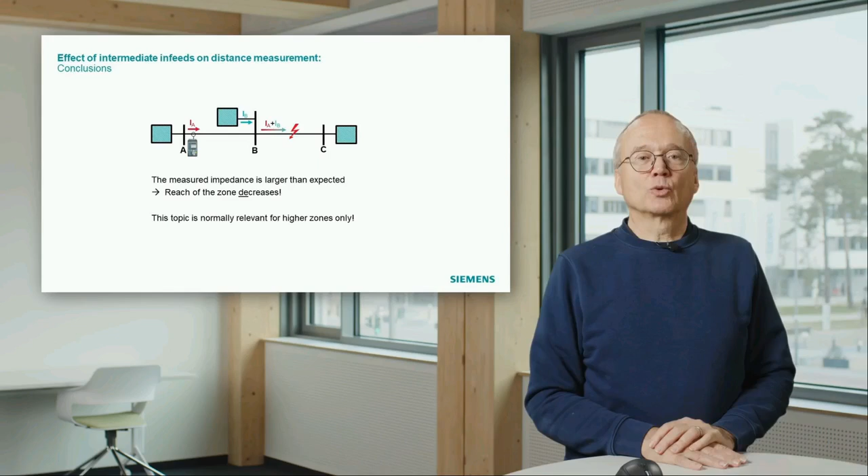And with that we are reaching the end. So that was a look into the sensitivity for distance protection.